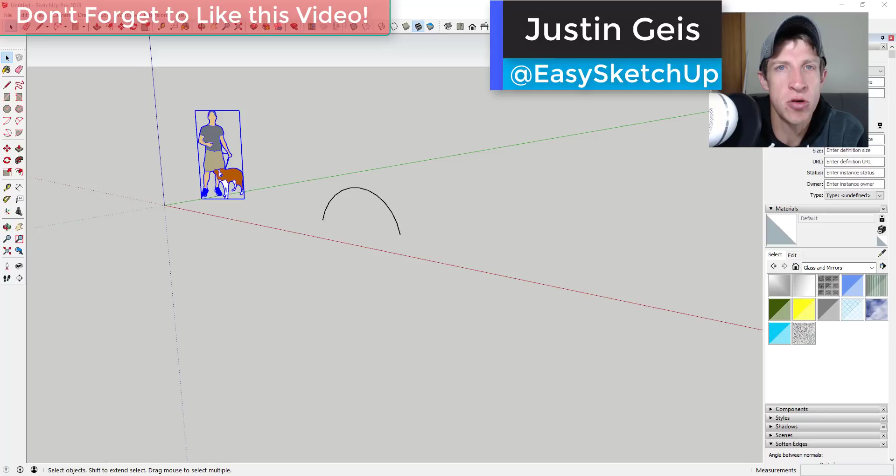So I'm kind of continuing with my focus on combining extensions in SketchUp. Today we're going to combine TIG's Extrude tools along with Joint Push-Pull and also Quad Face Tools, kind of see what we can create. What I've really been trying to push is if you take extensions and combine them, you can do crazy cool things.

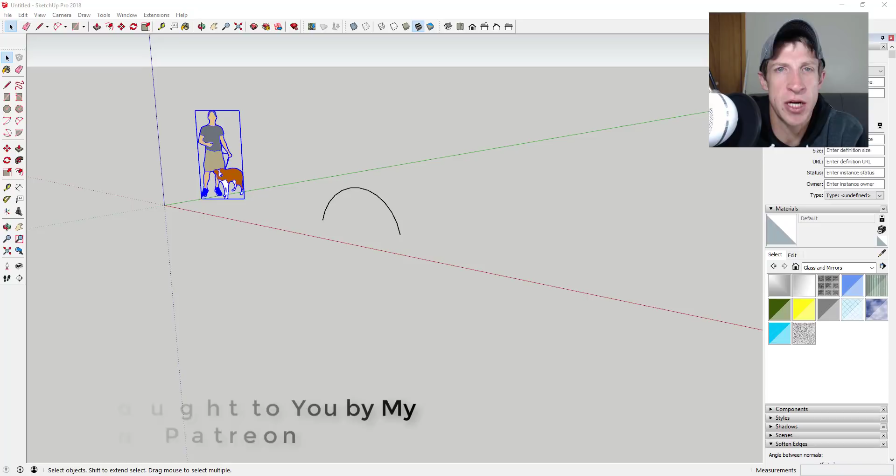Now let's go ahead and just jump into it. I'm going to start off by saying I really don't know what this shape is going to end up looking like, but what I really want you to focus on is the way that the extensions are going to work together. So what I'm going to start off doing is I've drawn an arc that's just kind of standing up.

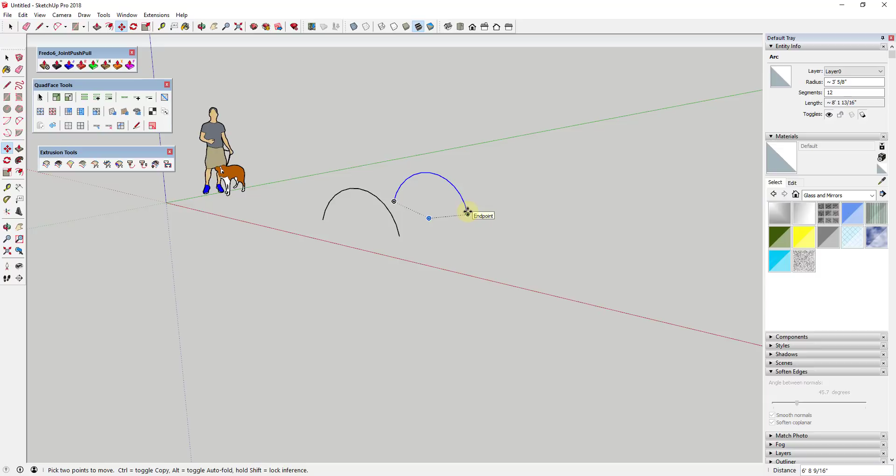I'm just going to make a couple copies of that using the Move tool in copy mode. So I use the Move tool by tapping the M key, clicking on the corner, and then tapping the Control key in order to create my first copy. Then I'm going to type in something like x4 and hit the Enter key. So what that does is create a series of arcs within my model.

Now I'm just going to use the Scale tool to kind of scale these up and down and in and out, just to make a little bit of a different shape, something that looks a little bit different.

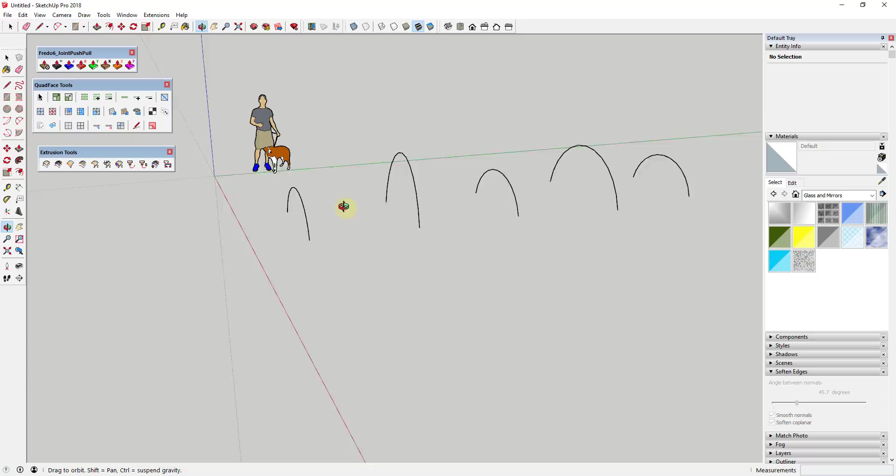So we've got our series of arcs, and what we want to do is create a shape across these. There's two ways that I would do this: the first is by using Curveloft and the lofting options there, or by using TIG's Extrusion Tools. In this case, we're going to use TIG's Extrusion Tools.

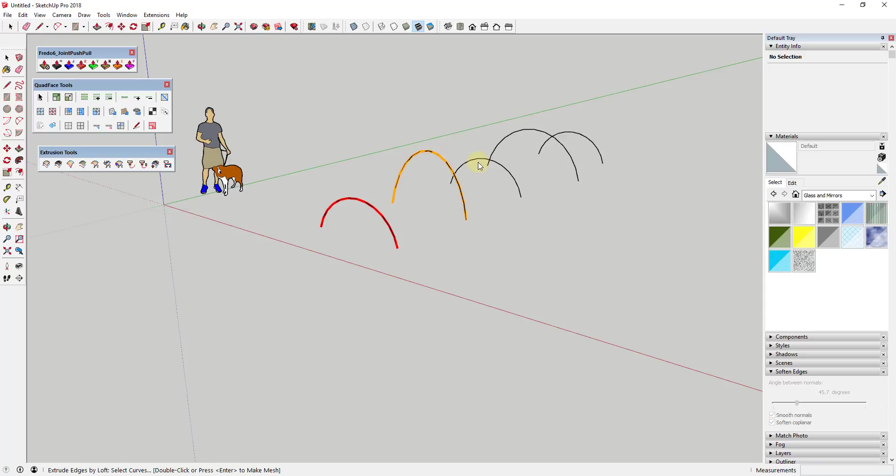The way that works is there's a button in here for Extrude Edges by Loft. Basically what that means is you activate the tool, click on a series of edges, and then hit the Enter key, and it's going to ask you how many segments per section - that's asking how many segments you want this broken up into. In this case, I'm going to leave it at 12 and click OK.

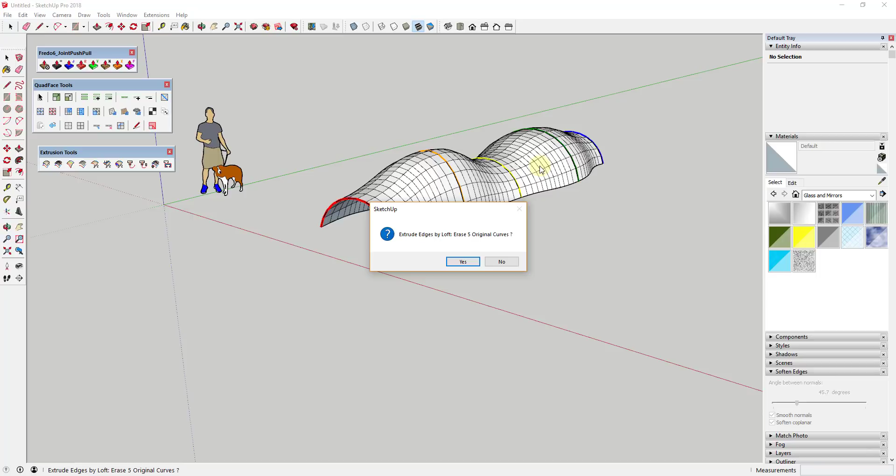What that's going to do is create a face using those edges. It's going to ask if I want to reverse the faces, and the answer is no. Then it's going to ask if I want these to be quad faces, and I'm going to say yes - basically that's going to hide the diagonal lines in each one of these faces. Then I'm going to say no for erase my original curves because I might want those.

So the first thing I'm going to do is drag this off to the side so that I can actually work with it. Again, like I said, I'm going to keep these for right now just in case I need them. But basically what I'm going to do is start messing around with the hidden geometry in this object to see what we can create.

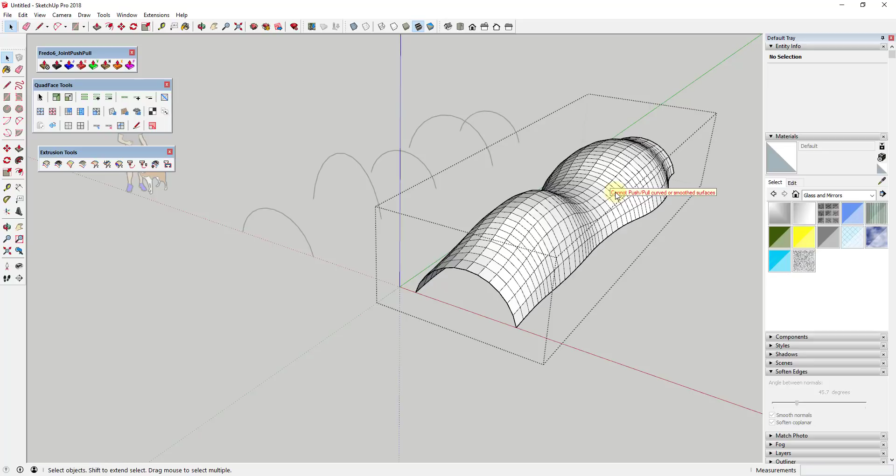The first thing I'm going to do is - right now this is broken up into a whole bunch of individual faces, and I can't do anything with them right now. You could push-pull each one of these faces individually, but you can't even do that because these faces, if you turn on your hidden geometry, are actually split up into triangular faces. So each one of these quad faces is actually like a pseudo quad, meaning it's broken up into 2 triangles. We can't do anything with these the way that they are.

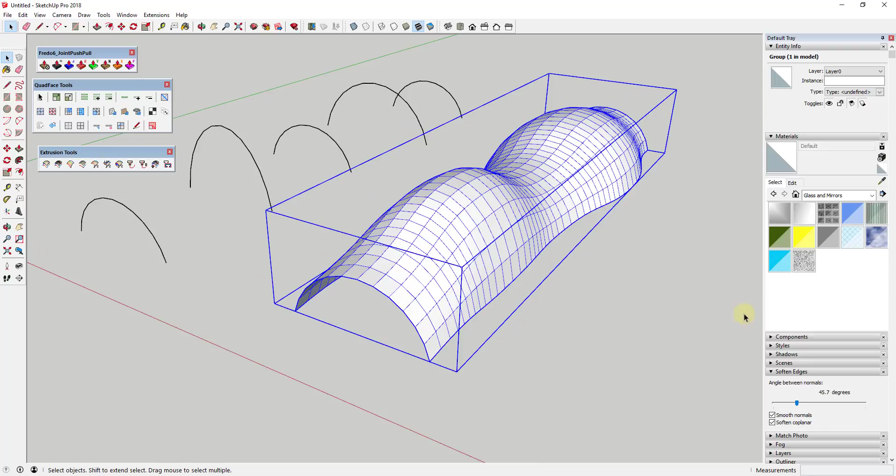So we're going to start off and we're just going to soften and smooth all these edges, using the Soften Edges tool in order to do that.

So basically you just select your object, and you just move the slider until all of your edges get hidden, and some of them may show up no matter where you move your slider. If that's the case, check the box for Soften Coplanar, and they should get softened. You can see what this does is this leaves us with this smooth shape.

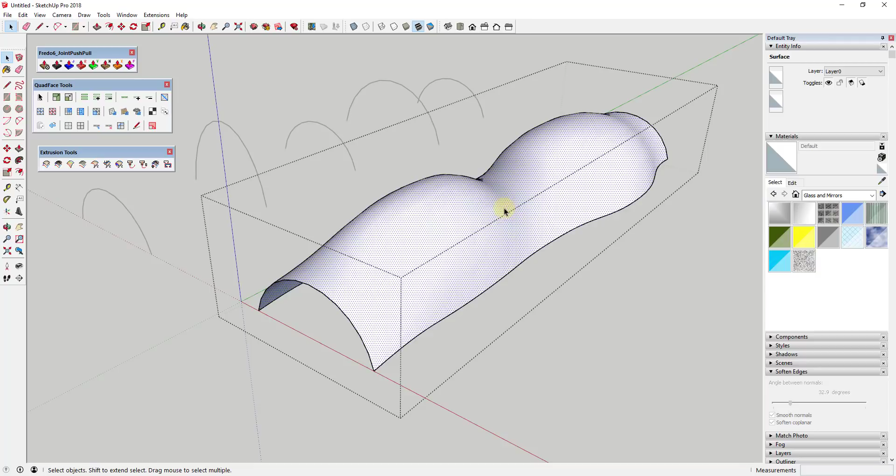This face is in here as an actual smooth single shape. So if we wanted to, we could use the extension Joint Push-Pull in order to give this a little bit of thickness, and we're going to go ahead and do that. I'm going to select this first option for just Joint Push-Pull, click on this face by single clicking, and then move my mouse out to make this thicker, and then click.

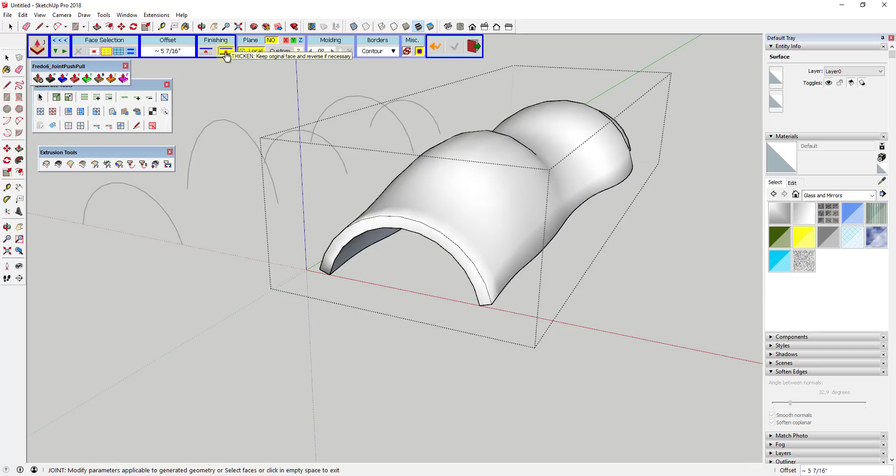You may have to mess around with some of these settings a little bit. Make sure you leave it on the Thicken setting right here, and you can also select this option to generate that as a group. You can see how that allows us to create kind of a thickened shape.

That's great, that allows us to thicken this shape, but now I want to go a little bit deeper. The way I want to go deeper is I want to start breaking this up into individual faces that I can then use Joint Push-Pull on in order to extrude out.

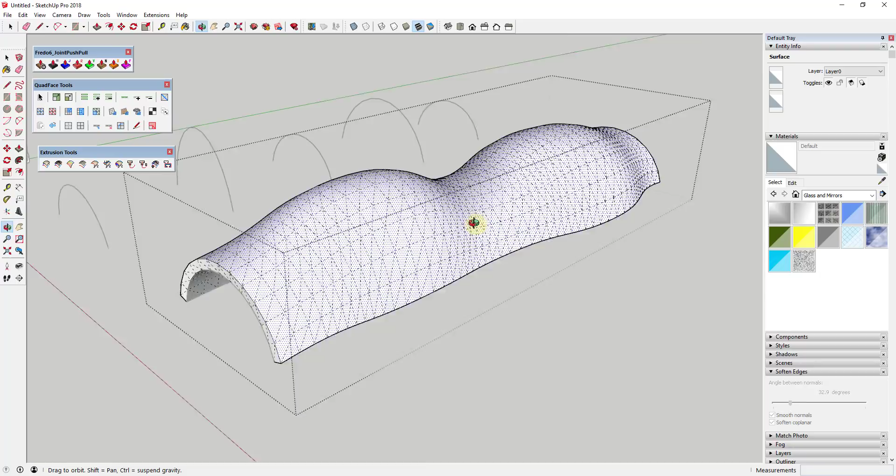So you could come in, and first thing we're going to do is mess around with our hidden geometry. We're going to go to View and turn Hidden Geometry on. Now if you wanted to, you could come in here and start selecting edges individually like this, clicking all around your model on all these different edges. You can see how these are hidden or softened because they're dotted.

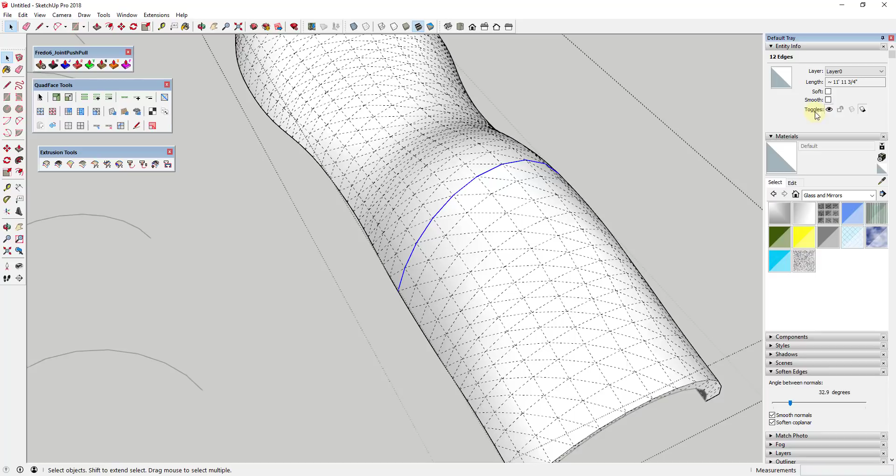You could uncheck the box in the Entity Info for Soften and Smooth, and then turn your hidden geometry off, and you'll see how now this is split up into two faces because I unsoftened and unsmoothed the edges between them. You could do that, but it's going to take a long time, because you have to click on every one of those edges individually.

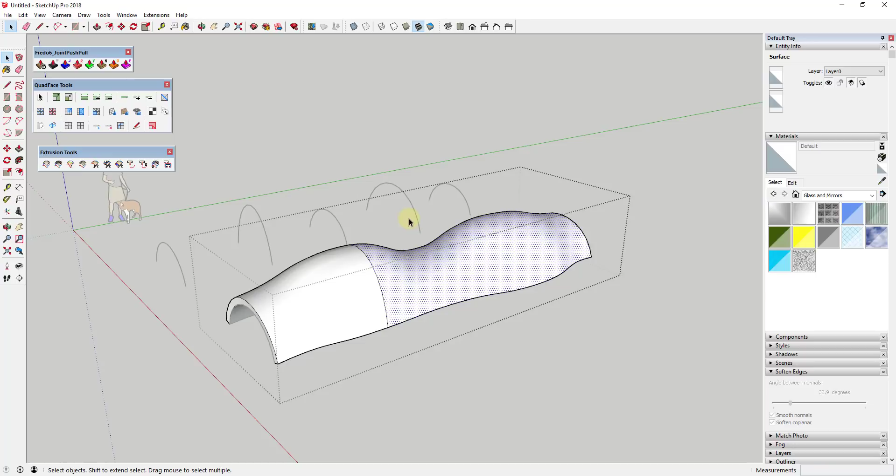If you remember, back before when we did this, it asked if we wanted to create our geometry as quads, and when we said yes, that created all these faces as these squares, these four-sided shapes. In SketchUp, quads get a little complicated, but it kind of views these as quads the way they're broken up. So even though they have a triangular edge across the face, this is still viewed as a quad in SketchUp.

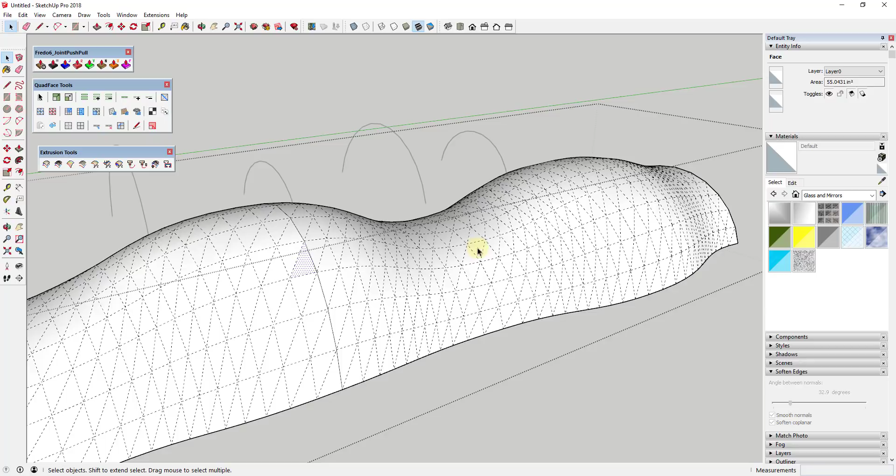What that does is allow us to use a tool from Thom Thom called Quad Face Tools. Quad Face Tools is designed specifically for working with this quad geometry, or geometry with four sides. Quad geometry is generally looked at as being a better way to model because it's more predictable, meaning you can write better tools for it.

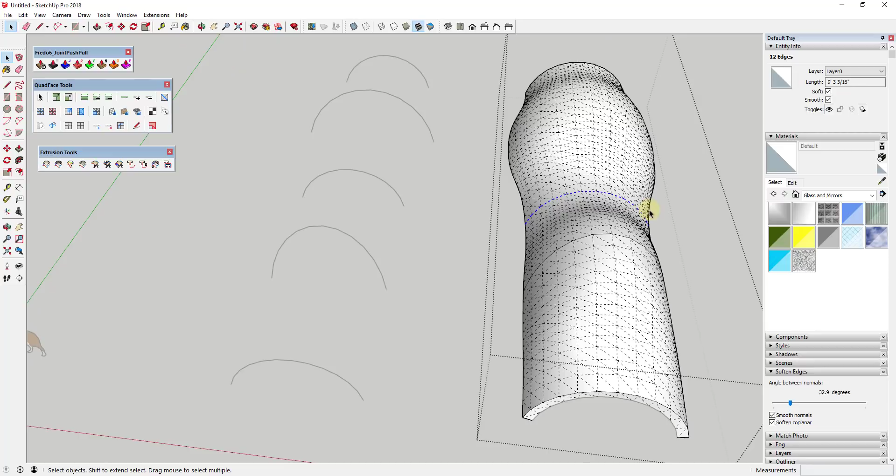In this case, there's tools in Quad Face Tools like this one, which is Select Loop. What Select Loop does is allow me to select all the edges connected to this one that would be considered part of this loop. So it makes selecting objects in your model a lot easier.

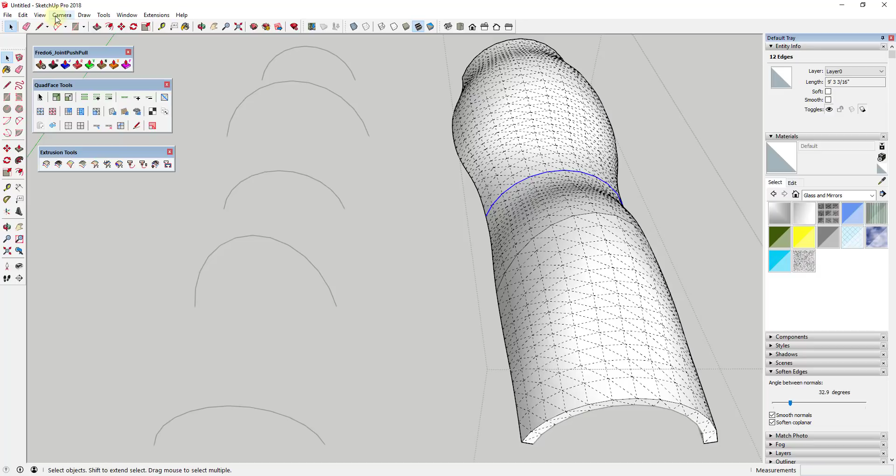Instead of having to come in here and shift-click and do each one of these individually, I can just click on this edge, click the button for Select Loop, and you can see how I get that whole edge. Then I can come in here and unsoften and unsmooth that one as well. If I turn my hidden geometry off, you can see how it was really easy for me to break this up into these two different edges.

Now let's go through and do that a couple more times, or maybe just one more time over here. We'll go to View, Hidden Geometry, and I'm just going to select one of these edges and click the button for Select Loop. Then I can uncheck the box for Soften and Smooth.

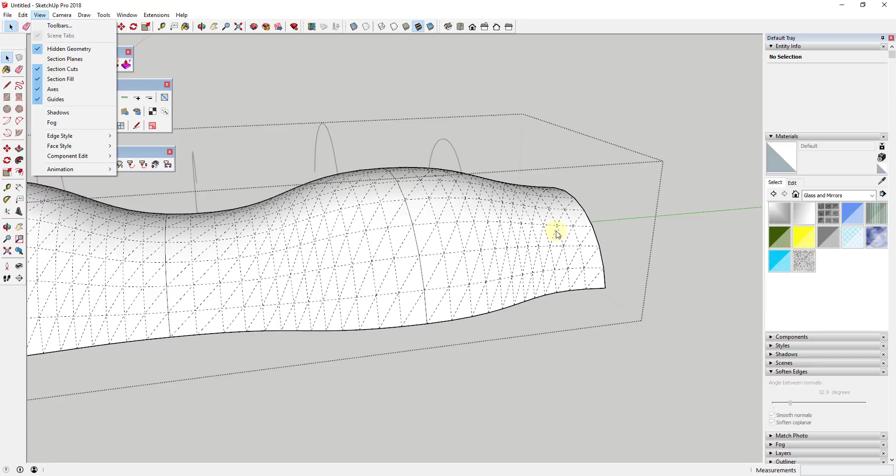One thing to note is if you wanted to select something along the long axis as well, you could do the same thing there. You can see how Select Loop will bring you a loop. There's actually a couple other tools in here, like Select Ring, which lets you split these out individually. We don't really want that for right now, so I just want to select this loop again.

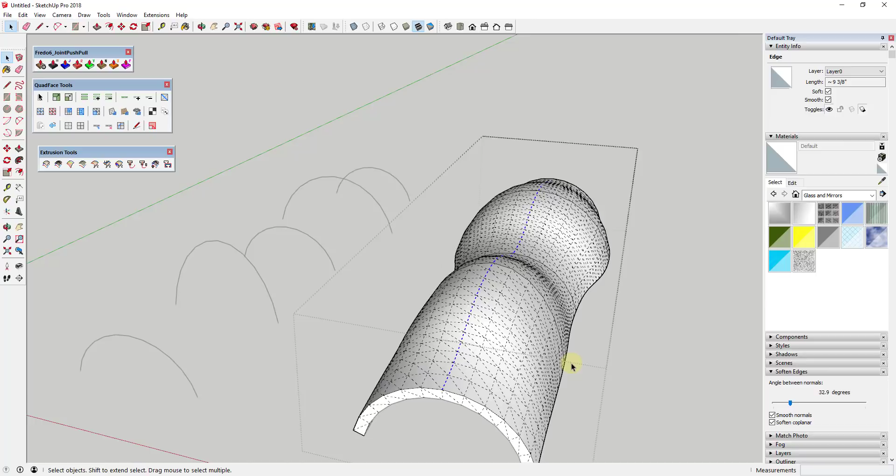I'm going to go ahead and unsoften and unsmooth that one as well. So now if I turn my hidden geometry off, you can see how I was able to break this up into different faces, and there's a few things we could do with this.

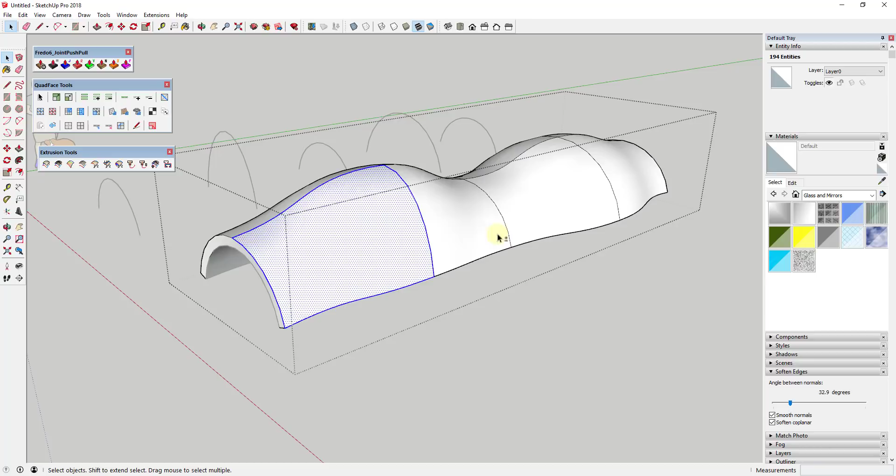In this case, I just want to use joint push pull to basically make this more of a unique shape. You could also come in here, select your edges, and use something like pipe along path to create more of a framework. But in this case, we're just going to play around with joint push pull.

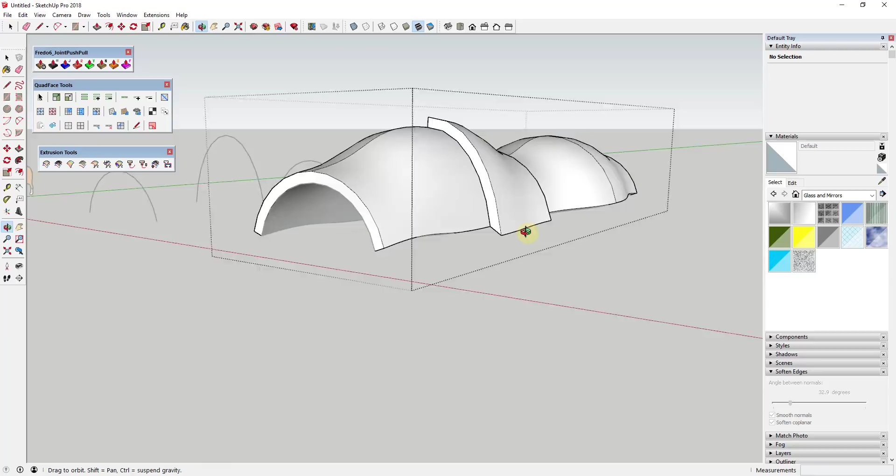Joint push pull allows us to use an option called vector push pull, which I think is what I want to use in this case. You could use the regular joint push pull, and let's just do a little bit of both. So this is what the regular joint push pull would do—it kind of pushes pulls everything out. What I don't like about this is it actually push-pulled this down a little bit as well.

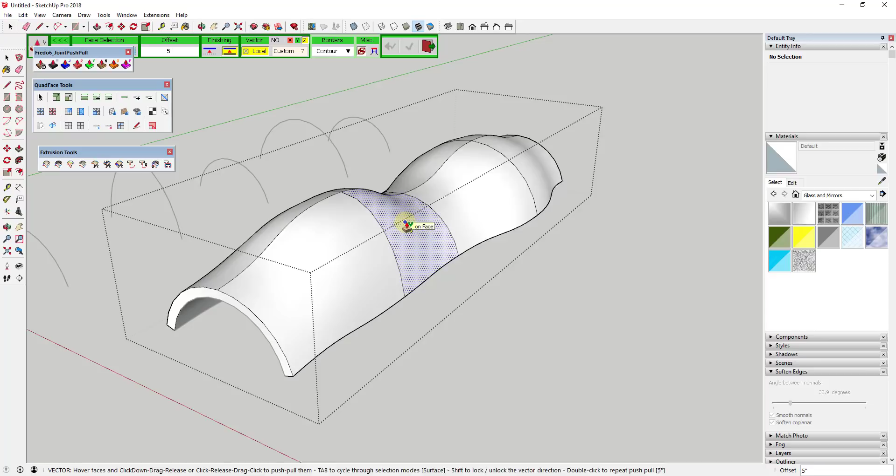What I want to do is just extrude this straight up. So I'm going to select the option for vector push-pull, which is the green option, single click on this, and extrude it straight up and down. Joint push-pull works the same way as other tools in SketchUp where it has a memory, so if I run vector push pull again and double click, this allows me to push pull up the same length as before. You can see how I can do that really easily.

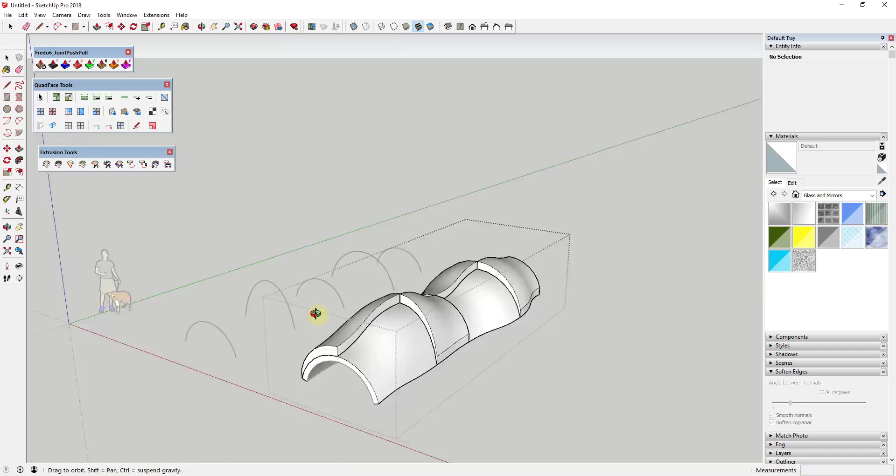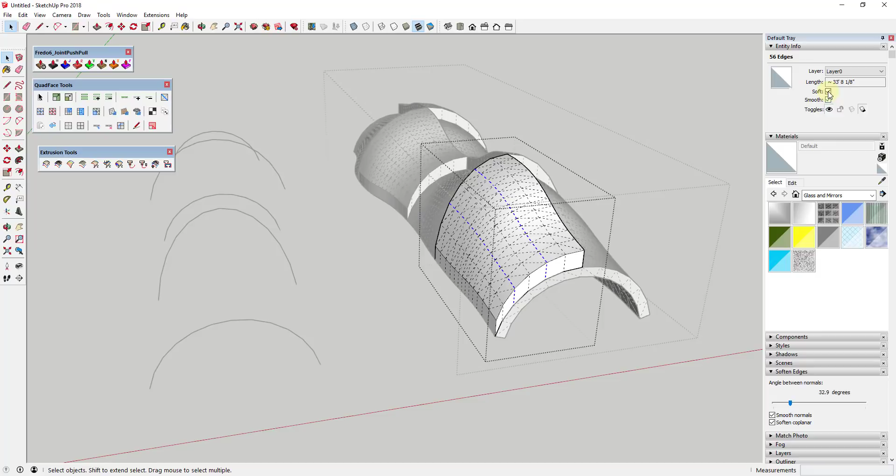Based on this, you could do some other interesting things too. Let's say you wanted to add some stripes on some of these edges—you could do that by turning on hidden geometry and using the Select Loop option to select all of these loops, then unsoften and unsmooth those. Then if I wanted to, I could use vector push pull to push pull that up in order to create even more articulation on this shape.

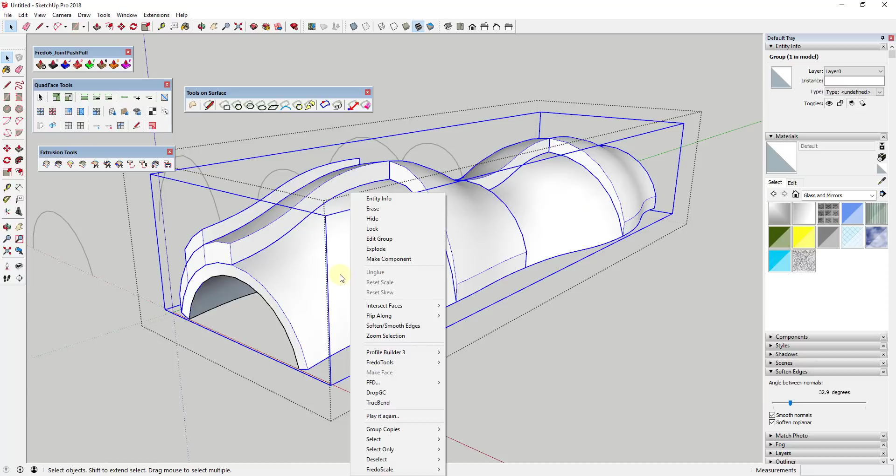You can see how by combining these extensions, being able to come in here and do something like this is really easy. Even if I wanted to, I could come in here, deselect these, and hide my shape down below. We'll go ahead and hide this one too. But you can see how you could create kind of crazy structures and other things like that as well.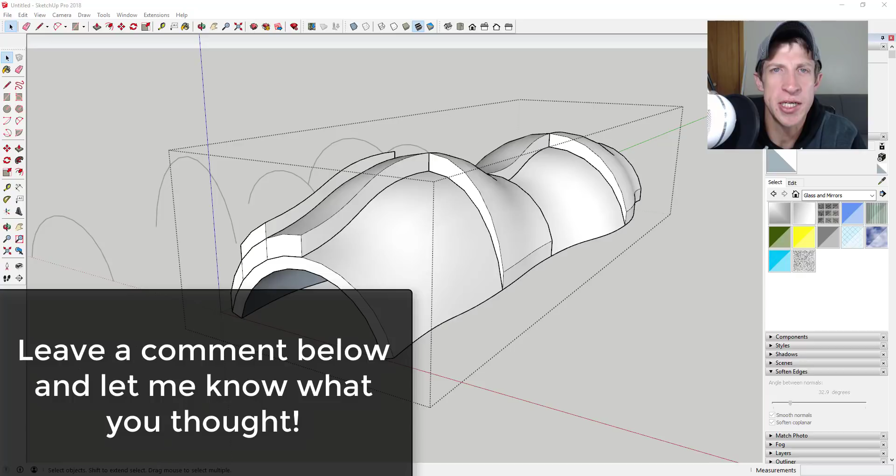The idea of this video isn't to show you how to create a particular shape as much as it is to show you the power of combining extensions. From there, I'd love to hear from you guys on what you think we could make using these different tools.